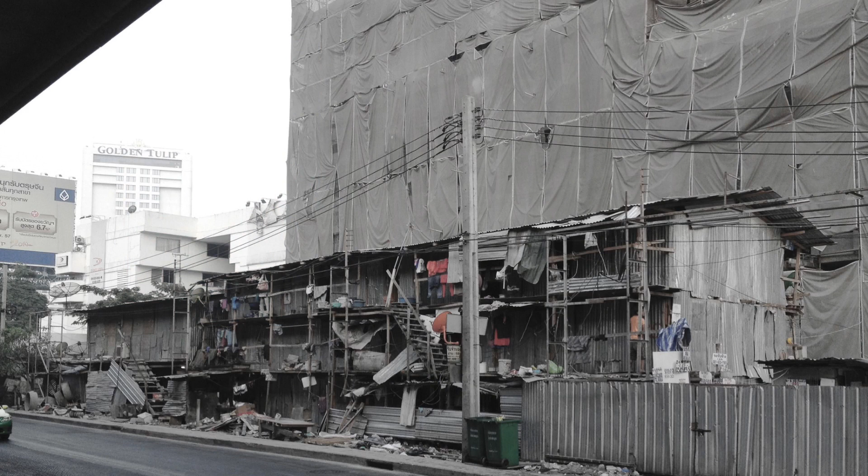I started looking at construction worker houses. Do you have construction worker houses in here? So see, we're brothers and sisters.

But if you ask most people, even architects, they look at this and don't see any value in it. But to me, this elevation has so much life and authenticity. You can see people, okay, it's messy, that's fine, but the composition is done in a very organic way. You can see where people wash their clothes, cook their dinners, drink their liquor, play hooky from work. So it's a very authentic and true architecture.

When I first started photographing it, I just thought it looked interesting. I didn't know why, it made me feel a certain way, that it's authentic. But I wasn't brave enough to do anything more until one day I said, I'm gonna draw it, because if it's interesting enough, we should treat it as real, genuine architecture and give it respect. So we went in, first I photographed it, then I measured it, and started to draw and understand what a construction worker house is, very simply.

The rooms are small, right? Very hot, very uncomfortable, many times out of corrugated metal. But there's another element, always: a scaffolding. Usually a circulation or veranda or covered overhang that becomes a mask, or becomes what I call a life scaffolding, that fulfills many functions, tropically and in life.

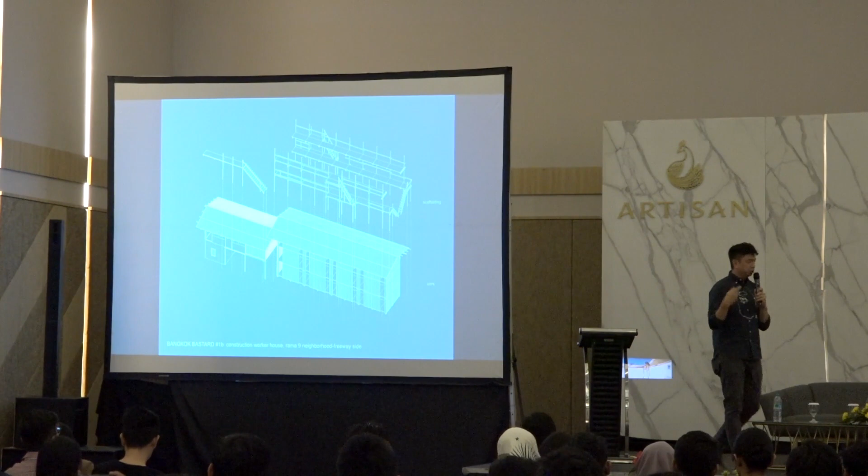The scaffolding becomes a place where in the daytime the workers never stay inside, it's too hot, so they hang out on the scaffolding. They cook, they eat, they talk, they socialize, they get drunk, they fight. And we start to see a pattern of how these rooms and the scaffolding change in order to adapt to different situations.

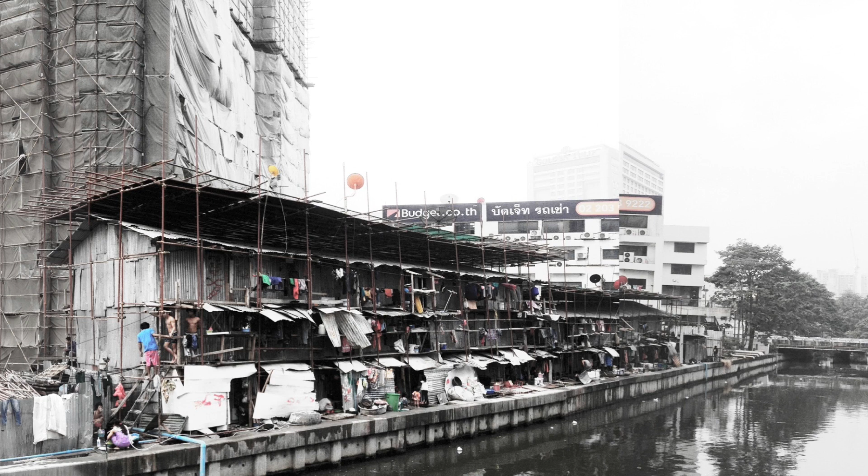For example, this is the same condominium development that has a construction worker house in the back, next to the canal. But here the scaffolding has been transformed into a helmet, to block construction particles from going down through the roof. So now it's a defensive hat.

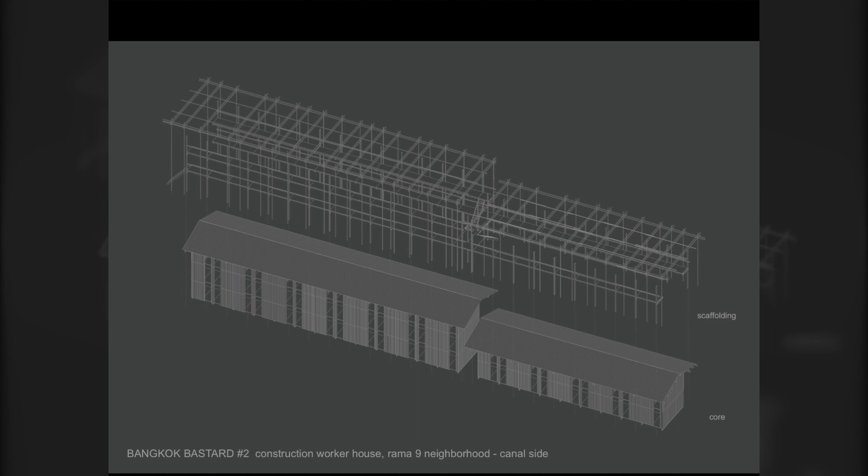If you understand these single modular elements, you understand that you can manipulate them. The scaffolding could be on the outside, or it could be on the inside as a double-loaded corridor. Isn't this a beautiful building? No architect designed this, just construction workers.

And so this one has an internal corridor, a double-loaded corridor, that is also a wind tunnel. So they cook and eat here as well.

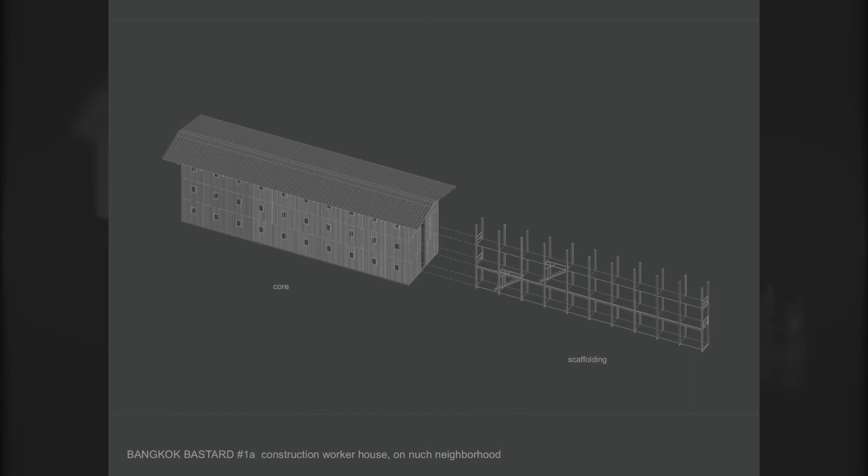And so if these are single buildings, they can then be added together to become housing. Core, scaffolding, core, scaffolding, core.

And the great thing about Bangkok Bastards is that it's a loose system that people can improvise once they start building it. For example, look at this beautiful scaffolding corridor with corrugated metal sheet bent as a rain gutter, and the light reflects onto the underside of the ceiling.

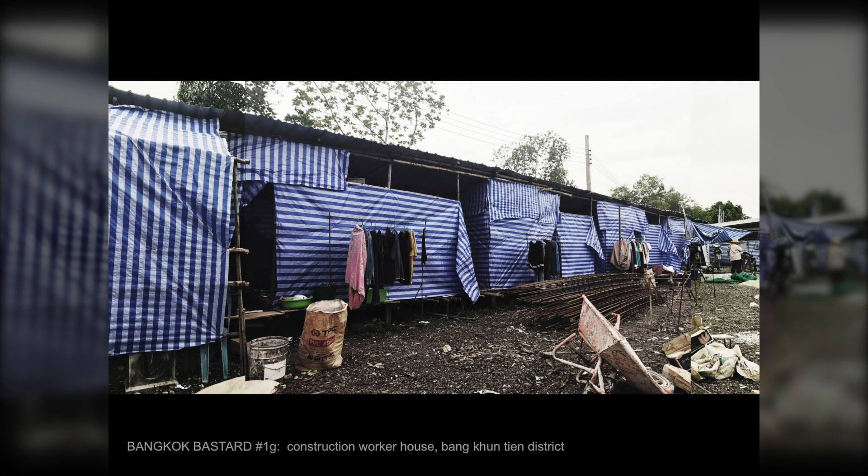Or they change the corrugated metal to building fabric. Cooler, but it also changes the meaning of architecture. So instead of opening a door with a doorknob, you unbutton the door.

And inside, because construction workers, usually migrant workers or local Thais, it's a temporary house, there's no furniture, they just sit and sleep on the floor. All they need to do is redefine what a window is. A window doesn't need to be plus 80 or 75 centimeters off the ground, it's right on the ground, because if you sit here, you just need the light down low. So you just peel your window up. It changes the meaning of architecture.

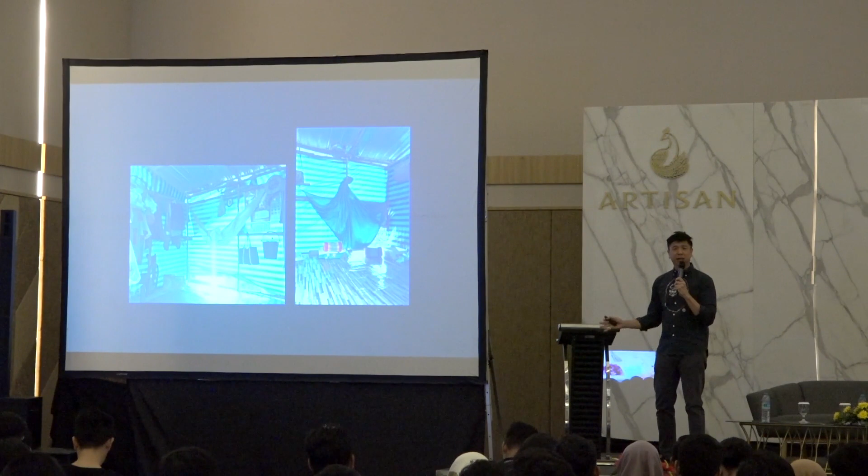In the most innocent way. There's no pretension about this. And so I started studying construction worker houses, and I started to diagram them in isometric. Drawing is very important to me. It sounds old-fashioned, but it's our main tool. Our main tools to see the world are plan, section, elevation, isometric, perspective maybe. So I always approach every project with these dumb, incredible tools.

So after the construction worker house, I wanted to go more into detail on these bastards, because I felt like diagramming them only reveals a very diagrammatic understanding of the architecture. But if I wanted to prove something else about why this architecture is so special, I have to go into more detail. Because when you have a view about architecture, it's all about a hypothesis, something that you kind of feel is true, but you don't know if it's true.

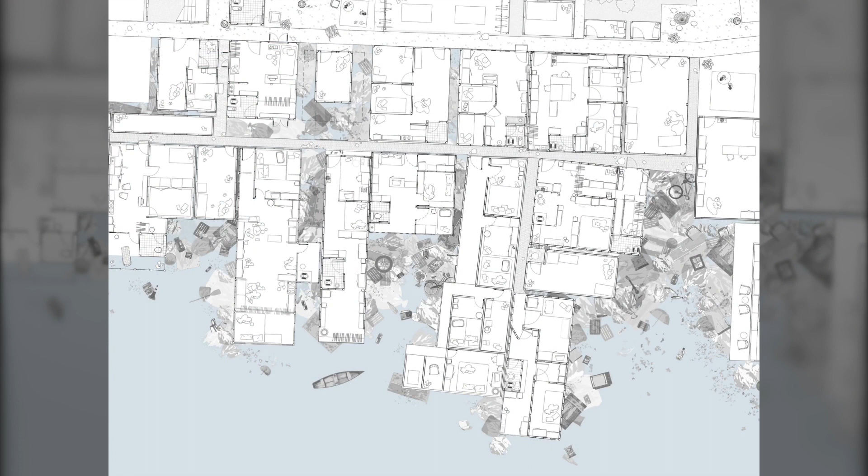So we drew everything—you see the insides of it? We drew pillows and mattresses and clothes hangers and cats and dogs, even the garbage in the water, because I feel like architecture for us isn't just construction, but small objects—potted plants, pillows, sofas, furniture, even bicycles. All of these make space in Bangkok.

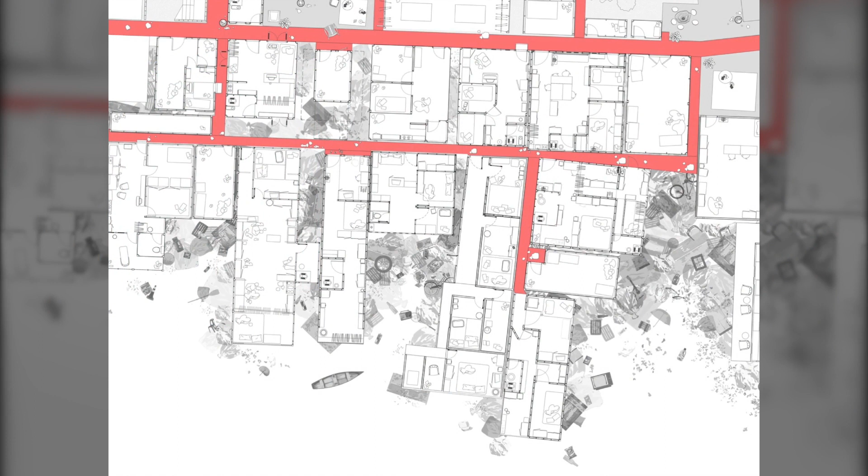Then we start to understand that similarly to the scaffolding, the circulation element becomes the outdoor community rooms where people come out of the hot, small interiors and hang out on these small 2-meter wide alleys. With this drawing, do you realize how much space and how much life this creates? These pots and pans and Buddha images and refrigerators and trash—the building becomes a whole different Asian thing, right?

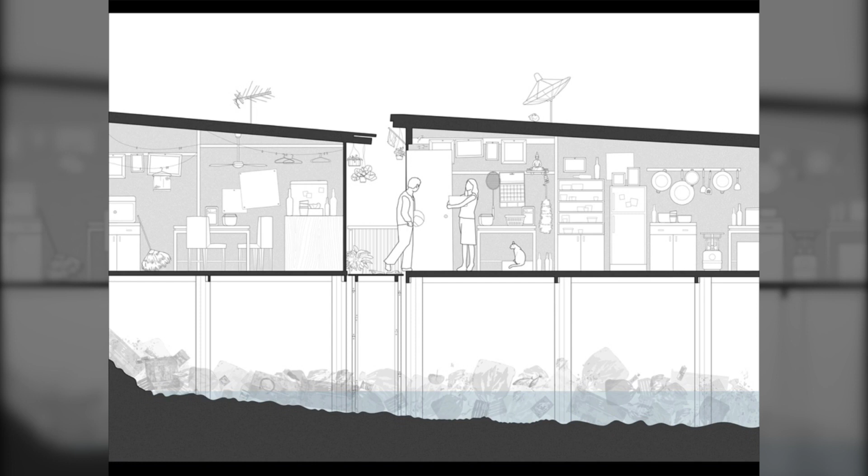So this is an important picture because it shows how life happens in the cracks in between and circulation—in informal spaces where, you know, alcohol, beer bottles, and baskets is architecture.

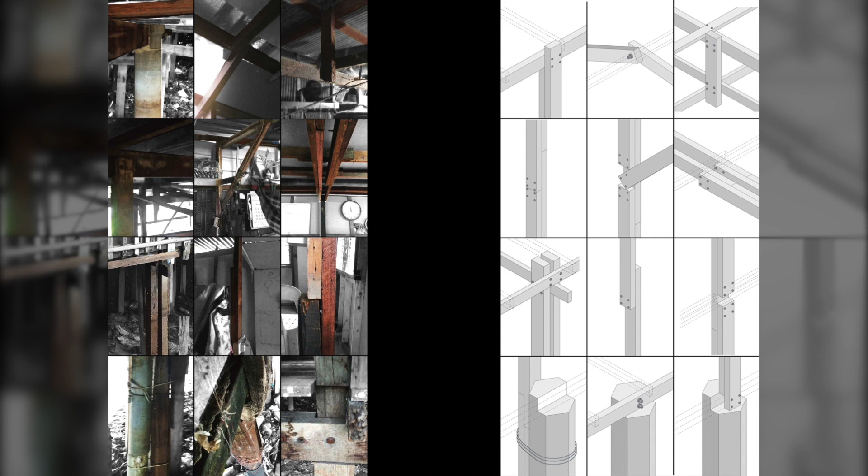So we went even further to study these structures in detail to see how the connections are made from used parts—old wood members, old steel tubes from construction sites, even old telephone poles are reused. But the connection is very unique—they're all fast joints.

Not Japanese like mortise and tenon where everything comes in crisp—we're the opposite. They're called bastard joints, because they have to be fast joints that you can attach quickly and detach quickly, because tomorrow the police will come and take you away, so you have to move. So the joints express this bastardness, right?

I'm going to skip between research and design to see how we work, because it is just a straight formula. This is the first project—I'll show you just 3 projects today. Sala Arya is a house and yoga studio for a friend.

She herself is an import—she was kind of raised in America and moved back to Thailand. So we have similar multicultural backgrounds and it's expressed in the project.

This project is in an exclusive residential neighborhood. I was talking to Andy yesterday about how I think the goal of middle-class Asians is to make money and move out of the city and buy a house with a garden, right? That's how in Jakarta you have land and house developments—single detached homes with a garden. I think a lot of people would like to have more space, have their own home.

So the way we conceptualize this project, and thinking about the research, the house architecture isn't the main actor. The main actor of this is called the soi, or the alley, the same type of alley that we saw in the waterside community, because we feel like the alley is actually a place where public life and the outdoor environment can actually thrive.

So this house is unique in that it mixes private and public. When the gate is closed, it's a house, a private house. But when the gate is completely thrown open, it is an extension of the alley in front of the house, which pulls you through the house and to the water beyond.

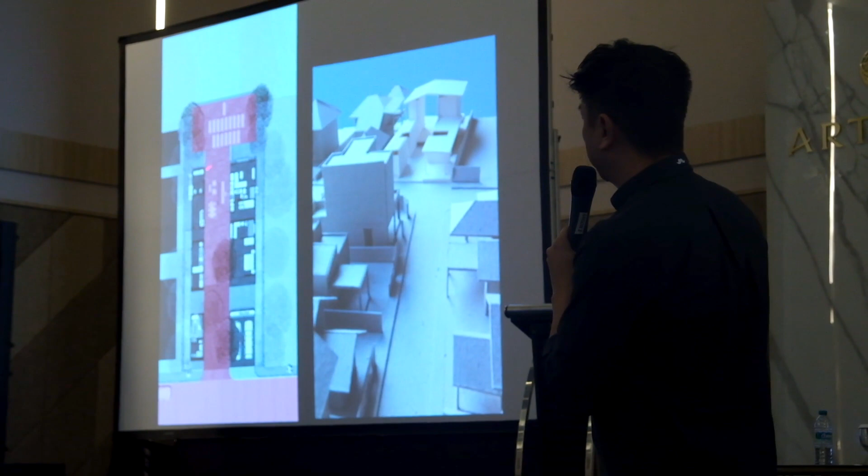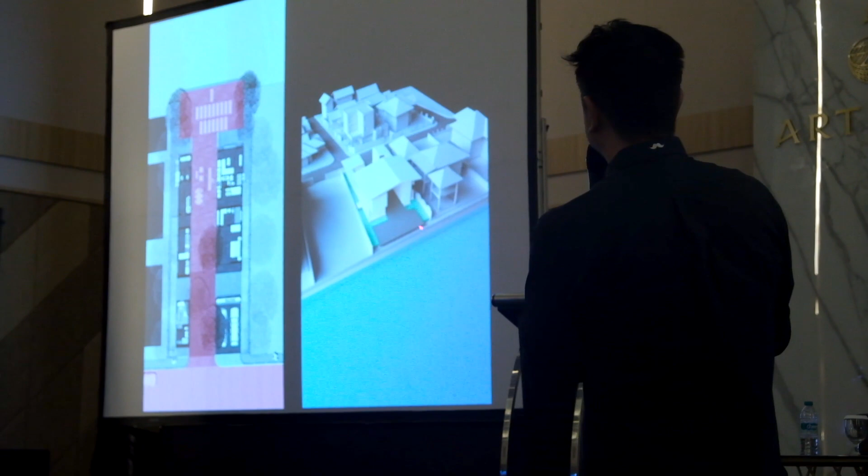So the houses are these two long longitudinal masses. Seen from the water, it's like a snake, like a cobra, that slides along, and its head comes up to become the master bedroom on top and a guest bedroom here. But the main space is this no air conditioning, completely passive ventilated outdoor alley.

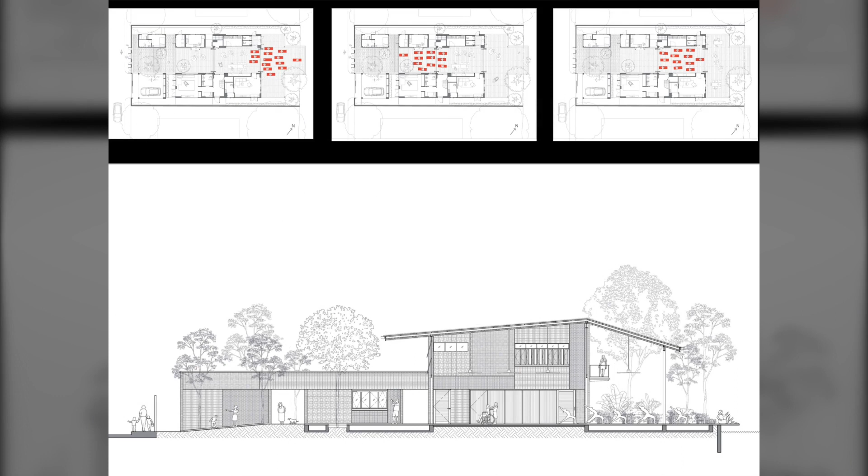So you see the plan right here, the ground floor plan, where the gate is thrown open and the neighborhood can spill in and learn yoga. In section, it's just a simple shed roof at the end that works as a kind of time-lapse shading device.

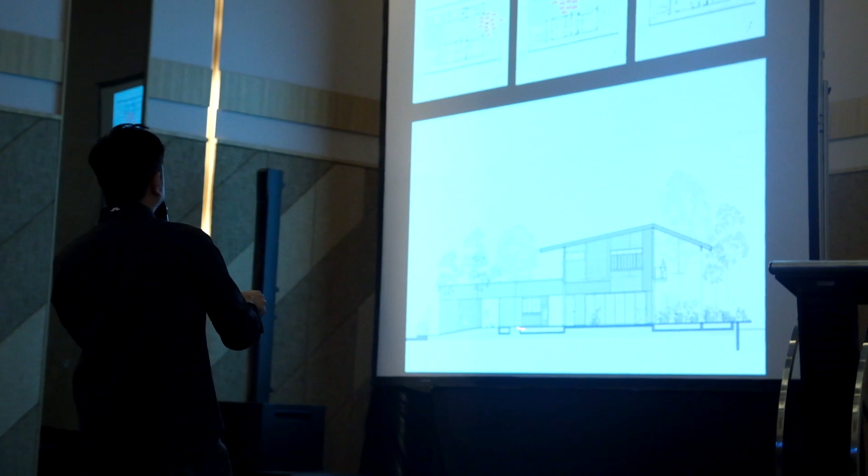For example, in the morning when the sun is coming from the east, they come and practice yoga here so that the shadow of the roof protects them. In the afternoon, when the sun is going down this way, they come and practice on the lake side so that the roof gives them shade. And when it's raining, they just practice underneath the roof right here in the middle.

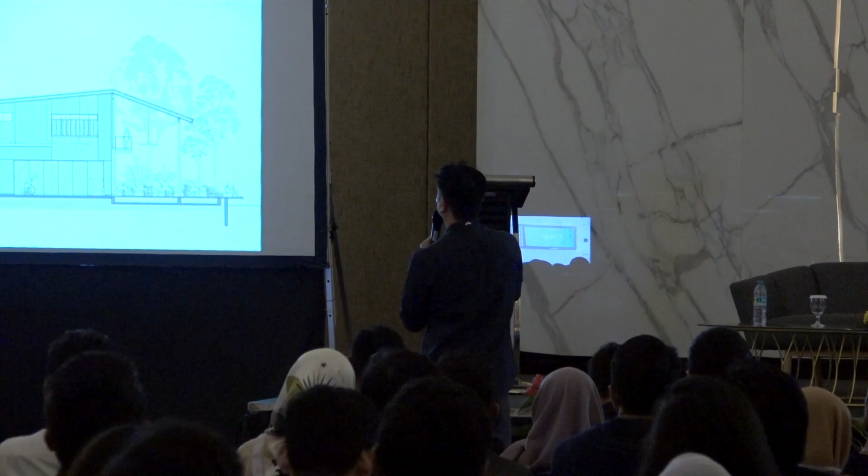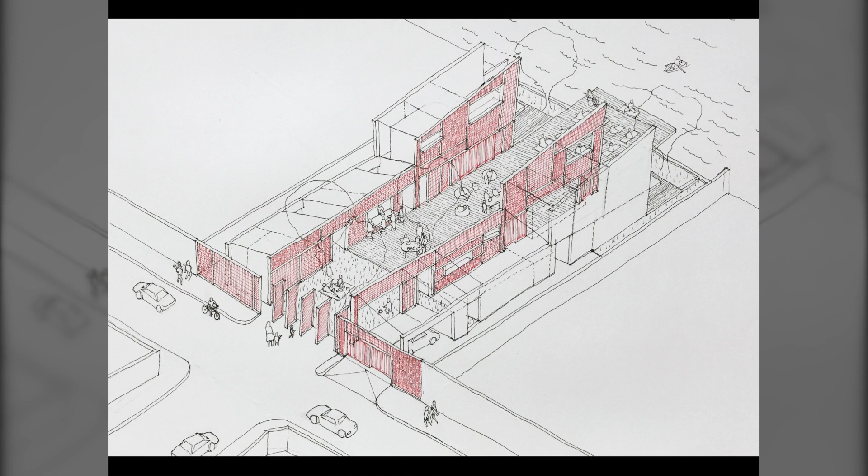The material finish is very important. We wanted to choose a material and use it in such a way that it becomes urban, architecture, and interior. Our projects are always trying to erase the boundary that separates these elements.

So we decided to use a special type of bastard brick, a bachinya brick. It starts from the gate and it bleeds and pulls the visitor inside the house, into the river, into the lake.

These are old doors salvaged from a 40-year-old Thai house. Their shutter doors are completely thrown open, and visitors and neighbors can just walk in and practice yoga here. So this house becomes a part of the street, much like the shop house, where the bottom level used to be part of the neighborhood. But now it's a suburban model, right?

So this is the multi-purpose space that they practice yoga on. No air conditioning at all, it's always open air, and there's always a breeze going through, cross ventilation. Inside, underneath the canopy, there are hard surfaces and softer surfaces for headstands and handstands for yoga.

But inside here is storage, a big storage room to put all the mobile furniture in, because the lifestyle in this house is very flexible. Whenever there's yoga school, all the furniture on wheels is wheeled in and stored there, so it becomes a multi-purpose space.

And if you go upstairs, the cabinetry is all wicker, rattan, so that the shoe cabinet ventilates. When you get to the back, this is where they practice yoga in the afternoon to escape the sun from the other side. But once they finish yoga, they relax and bring out all the mobile cushioned furniture.

And in the evening, it just becomes a relaxed space. The use of materials is important. We always like to use scavenged materials, but materials that have meaning, memory.

This is the guest bedroom that I told you about. So this is in the central void, so there are these green shutters or windows that happen in the interior, so it feels like it's an interior-exterior space. Same thing at the master bedroom volume, where you can open the green shutters and look down. But there's a kind of another layer of meaning behind it.

We bought these green shutters, 500 baht a piece, like super cheap. It's like $11. It's all teak wood, saved from an old elementary Thai school. I don't know how it is here, but in Thailand, if you see this color and shutters, you know it came from an elementary school like this. This is kind of too fancy, like a rich boy's school.

Usually it's much simpler, 2 levels with a corridor. It's either green, pink, baby blue, or purple in Thailand when I was a kid. Once you see that, that's why we kept the original green. We like the idea of this old Thai school element now being used in a yoga school.

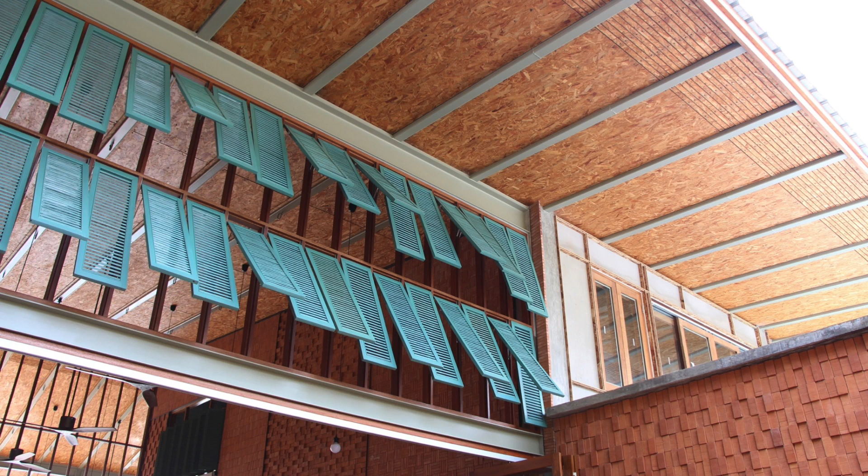When they combine, they kind of create a blurry overlap. We don't need to explain that this means this and this, but hopefully to somebody who knows these, it creates a blurry memory. I think it's super important to not just say, this is the concept, I'm going to show you very clearly this, and this.

The house is a butterfly, so it has wings, right? That's very first year architecture school, which I did in first year, I did a house with a butterfly. I think the idea of memory and being blurry and having many meanings is really good in architecture, right?

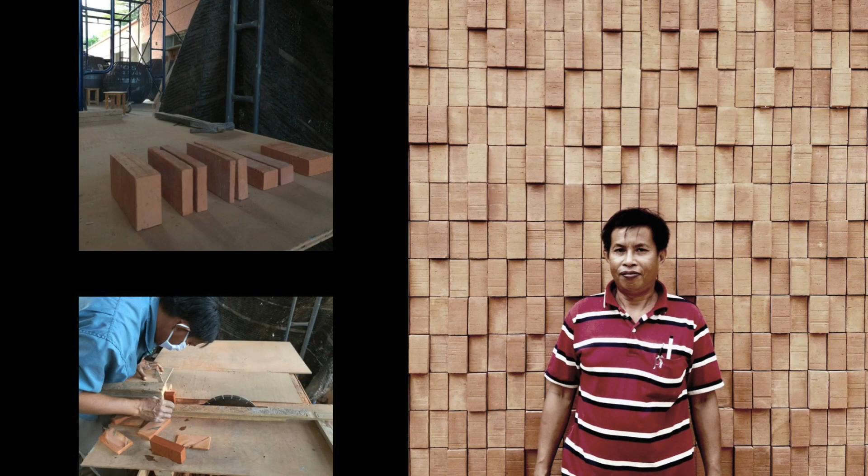Every job site has problems, catastrophic problems, but it's how you handle them. You see them as negative or as an opportunity to do something special. When we ordered the brick for this house, it was supposed to be 12 centimeters wide. We put in a 50% deposit, and when the first batch came and they unloaded the brick, instead of being 12 centimeters wide, it was 9 centimeters.

I asked the brick supplier what happened to the brick. He said, oh, there's a small shrinking percentage error. I said, how do you shrink 3 centimeters? That's 25%. I'm sure this type of problem happens on job sites here, and we couldn't do anything. So what happens if the brick shrinks from 12 centimeters to 9 centimeters? I won't have enough bricks to cover the building, so a quarter of the building will not have brick on it.

So I said, oh shit. This is our carpenter, Chang Nu. He calls me An, my nickname. Kun An, don't worry, I have a solution, I'm gonna chop the bricks. He chopped 15,000 bricks in 3 days on his table saw. And we agreed that he shouldn't chop them the same size, he should vary the sizes so that his hand is seen through it.

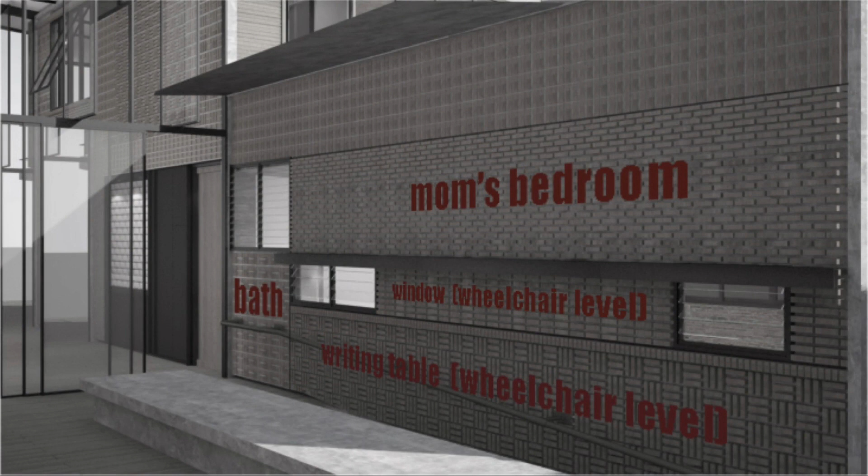But the patterns aren't random. Each collage represents a hidden function, built-ins, or activity inside the interiors of that mass, so it becomes a code for something more meaningful. So that's that wall right there. That wall is actually a low counter for her mom, who is in a wheelchair, so you can actually see the DNA of the wheelchair occupant in there. That's the bathroom, that's the ceiling plane.

So, in essence, the lessons we learn in this small little soi and alley translate into something similar in DNA, but may not look the same. So I'm showing you how research creeps in, right? I've been doing this research for 5 years. I didn't know when it was going to come in.

Next, I'm going to show you a hotel in the mountains. This one's called Labaris in the Mountains. This one didn't have documented case studies, but it came out of accumulated knowledge over the years as to the attitude we should have about resort architecture.

I'm sure you have this in Indonesia. So this is a resort in a very beautiful mountain forest preserve, with beautiful exotic animals that are only local to Khao Yai, or Big Mountain here. So it's a great natural environment.

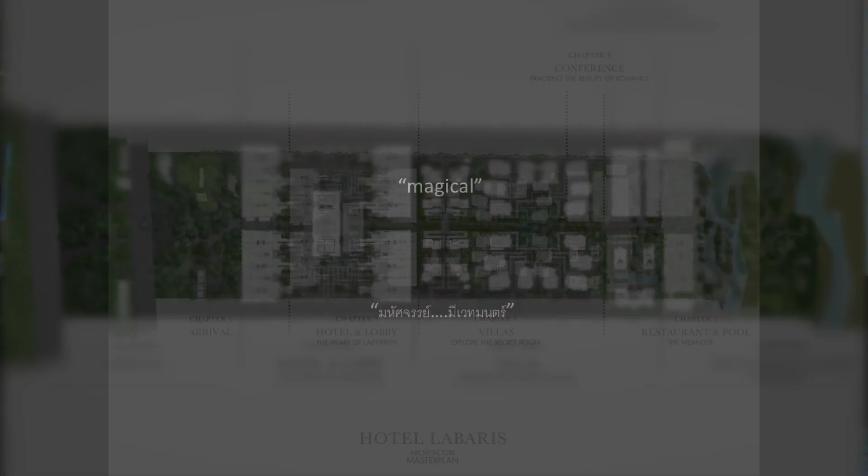And so what we did was this. The plot is, this is the street in front, and the plot is kind of a longitudinal plot. So there are mountain ranges on this side and mountain ranges on that side, beautiful views this way and that way of a wall of mountains. We're in the valley, and there's a beautiful natural stream at the back.

So what we told the client was that this will be a magical place. But instead of a master plan, we're dividing this like a storybook into 5 chapters: Chapter 1, Chapter 2, Chapter 3, Chapter 4, Chapter 5. And so there are different resort components: this is a welcoming garden, hotel rooms, villas, the Great Hall which is restaurant and conference, and then the swimming pool.

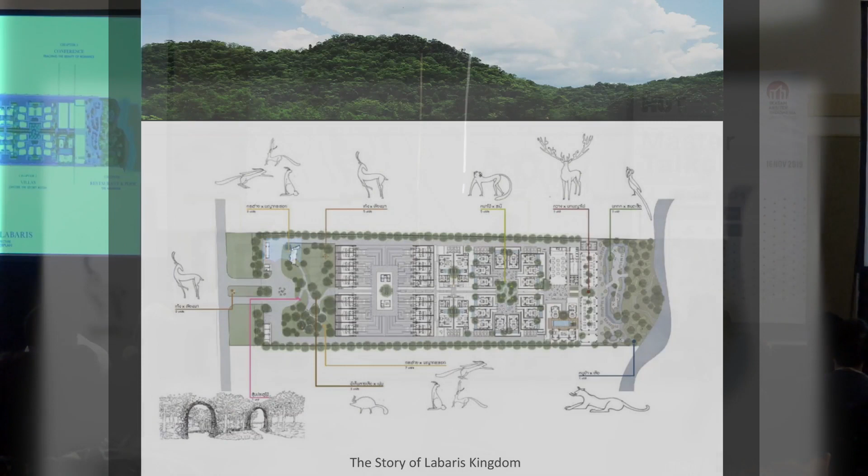But there are always 2 ways to tell a story, right? We work with a great graphic designer and brander called Be Our Friend. So together we researched that in Khao Yai National Park, there are all these unique big mountain animal species, from deer to fawn to rabbits to porcupine, to little muskrats, and even leopards that are very local Thai species.

And so this whole resort is a kingdom for these special Thai species. It's a way of giving respect back to this, not as a European resort, but actually something that's naturally, environmentally, and locally based. So we want to teach, especially the kids, when you come to this resort, you won't be transported to England, but you actually learn about the animals in this sanctuary, right?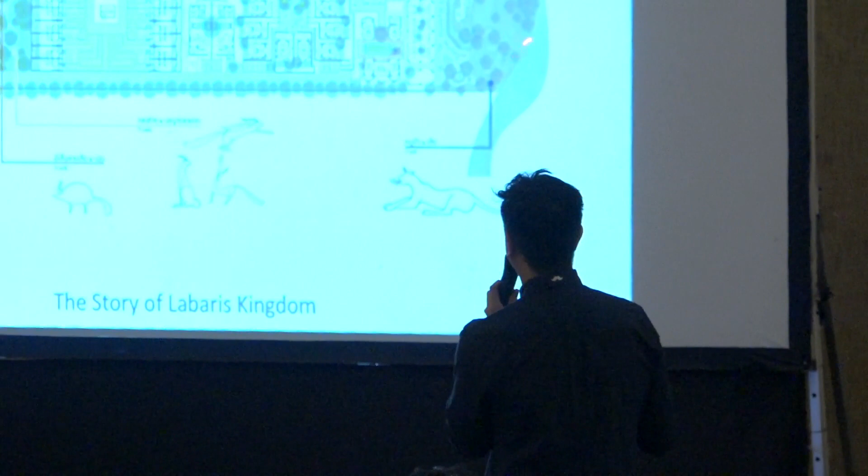But then we told them that in these 5 different chapters, different levels of society of animals live there. The lower society of animals, like the weaklings, the squirrels and the rabbits and the porcupines, live in this kind of everyday garden maze. The king lives in the hotel, which is like a palace, right? And the noble people, the noble animals live in the villas, right? And this is a throne hall, which is the restaurant, right? And finally, the swimming pool becomes an extension of the river in the back.

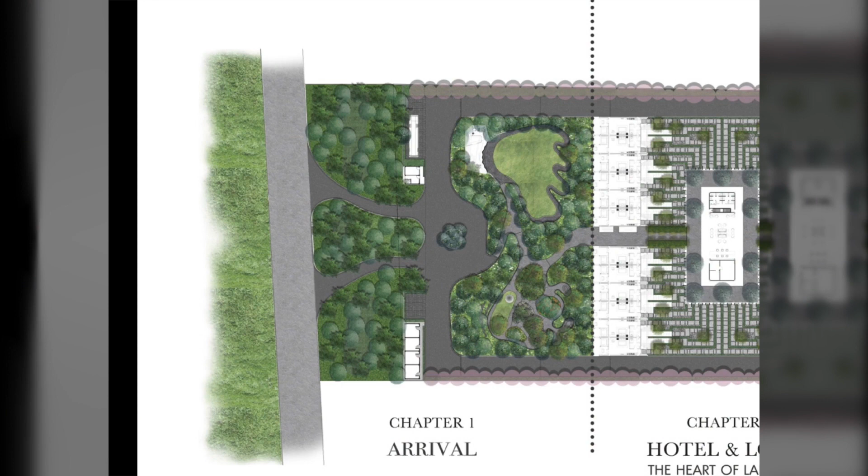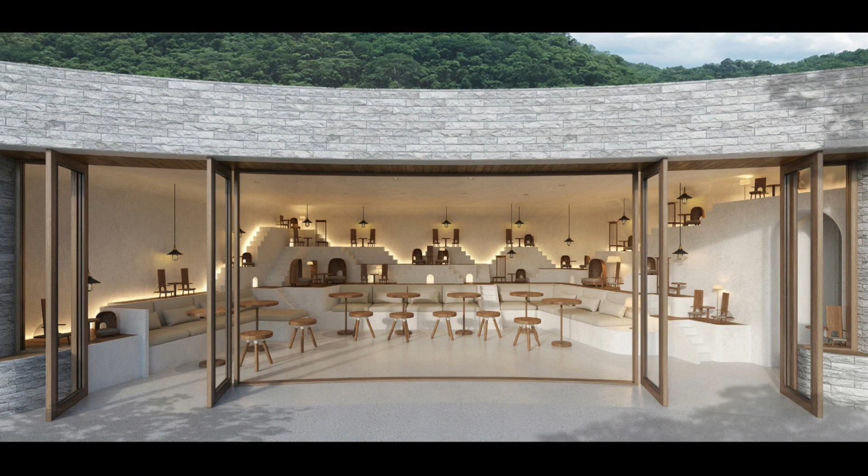So there are little burrows, little tunnels of animals and sculptures in these hillocks, right? But then it leads you to this cafe. This is a cafe that the public who's not staying at the hotel can stay at. And inside is actually where we say that all the little animals, the lower class, the rabbits and the porcupine and the squirrels come to the pub here.

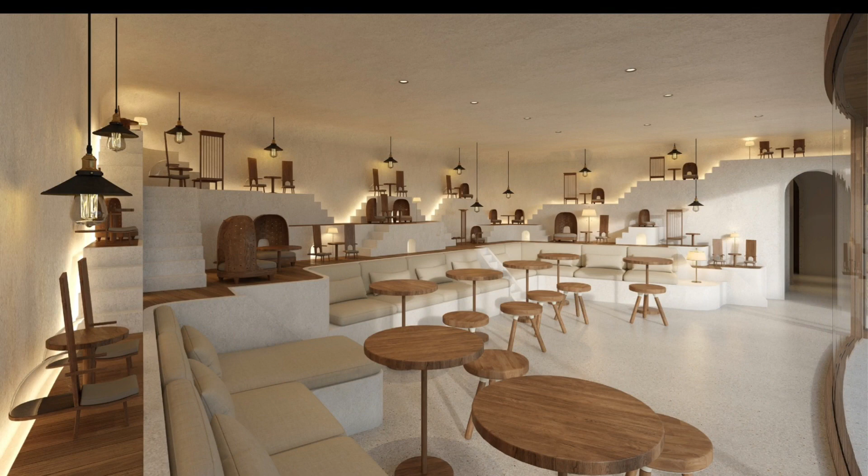And if you look, there are small little tunnels all over and small little customized furniture. This one is for a porcupine so that the needles can stick out. This one's for a rabbit where the tail can stick through. There's one with long legs for a special bird. And so we built this story where we said that the entire national forest is full of a network of tunnels where all these animals go through and travel and emerge from here into the cafe. So these are some photos we have of the real thing.

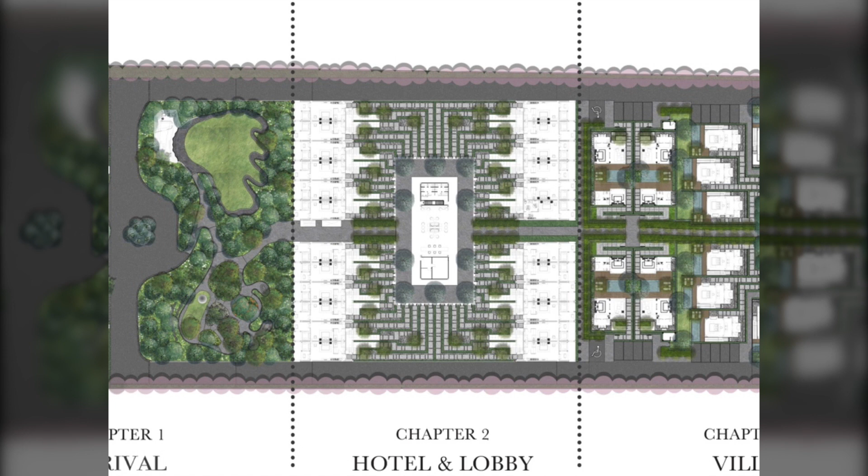Next, we have the hotel element. This is kind of like one of the critical players in this project. Again, there's kind of always a double story, both meaningful. So the hotel rooms are here and here. What we told the client was that this is actually a magical castle, right? Where the stone mass surrounds the cloister garden in the middle, right? In actuality, these are all shop house modules, 5 meters wide, just 2 strips with a connecting wall, right? We always have these secrets that deal with budget and always play double meaning.

So what happens is, similar to the labyrinth, and I'll tell you the history of the labyrinth. This is a drone shot. As a visitor, you come through the middle module, which is kind of like a gable tunnel that takes you to the heart of the maze, right? This is the heart of the maze. So you go through here into the middle of the garden. Go through this big portal, through a garden, and into this open air pavilion, which is the lobby.

And in the lobby, you'll find these magical drawers, which you open up. You get a welcoming package with your magical horns. Oh, all the creatures have magical horns. So we have a magical horn keychain, right? And a road map, and card key, and welcoming letter. And you take your key to the maze in the garden, because there are 48 different doors, all different. And you have to choose which one you go through, okay?

The maze can take you straight, but you may never see what the end of the road is. It makes you turn, and then you find your entry into your hotel room. Or it takes you to a stair that takes you to a second level. You never know where you're going to wind up.

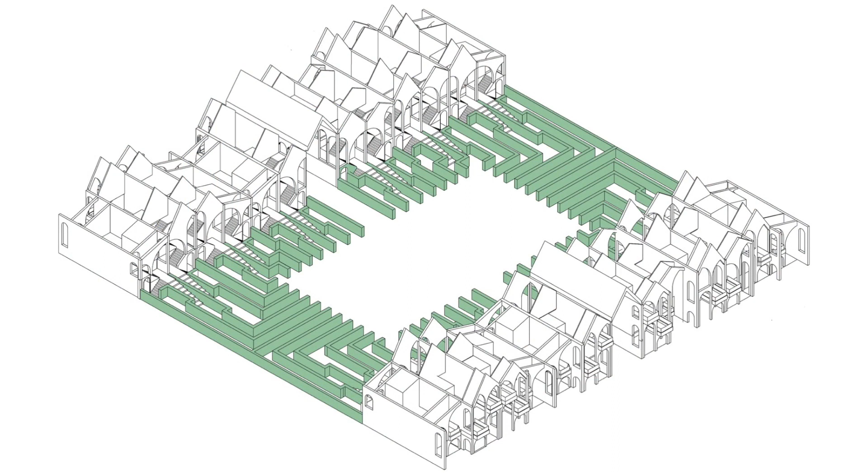And also, traditionally, the maze only has one entry and one exit. So we played the game in our minds that, what if there are 48 exits or 48 entrances? How does that change the idea of a maze from capturing a monster to welcoming hotel guests? We play these games all the time in our minds, right?

What happens with this is you're able to create a new type of resort, one where each room and each maze has its own private garden. So you have 48 different rooms with their own gardens, all geometrically not the same.

You can actually stay in your room, or you can have breakfast in your garden, or have outdoor activity. So we expand the area of a room to not just 30 square meters, but actually 40 to 60 square meters. Half of it is outdoors. And this labyrinth allows you to see your room with the back landscape of the mountains in the back.

So it creates a new type of mountain resort experience. And once you go up, you go through the maze, and you go up through this new type of architecture that's both Western and Eastern. This is another type of scaffolding in my mind, right? It's kind of a veranda area that allows you to set the rain and the sun away from the building, but the use of broken arches creates a new type of niche and volumes.

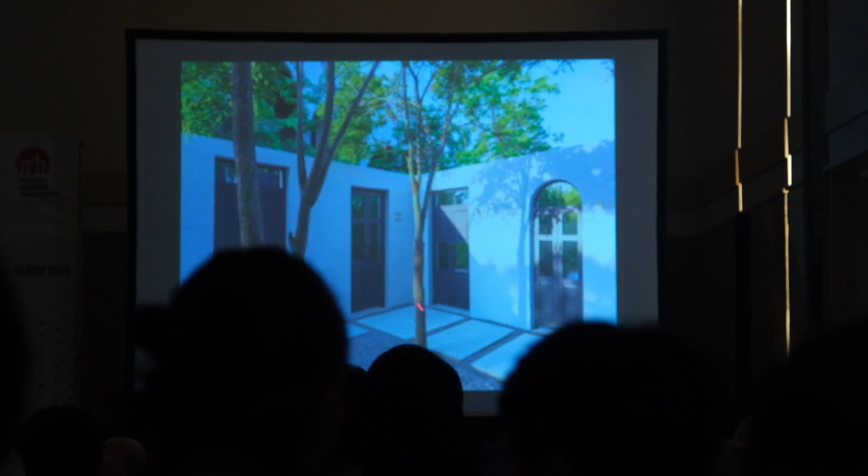The guest comes, usually Thai, and they say, wait, these are Thai doors. They have this narrow proportion, they have infill panels, but some of them have been taken out and turned into hollow, ventilatable screens or grills. So the idea of this Western and Eastern mixing in detail is important again here as well.

So we call it a new Khao Yai, which means big mountain, this sanctuary, this forest reserve, architectural language. So in creating a new language, we accept all the different languages, styles. We don't reject them, but create a new one, right?

So this is a collage we made at the beginning of the project, where first, Khao Yai had these sparse Thai houses that sat in the mountainside. But eventually, 20 years ago, these guys came in. We turned to this, we turned to that. So they're not random gables. It's encoded with meaning, right?

Even though the visitor or the reader may not understand it, it's still your responsibility to give it respect. I think that's important, I think that's the integrity of architecture. Not everybody has to understand what you're doing, which means that maybe you can't do just a dumb one-liner. You have to do something that has multiple readings, that it's rich, that has layers.

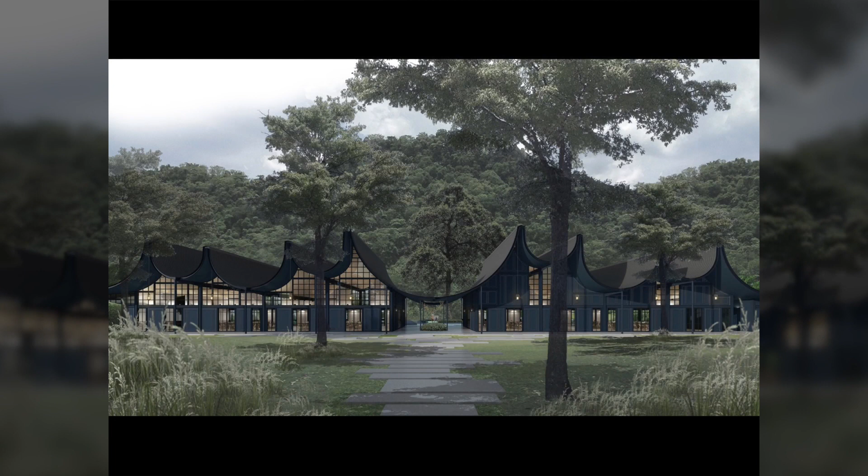And this is the real thing. Again, multiple meanings.

Secretly, I said it was a new typology of a Thai house, but I didn't tell my clients. I had another story for my client. I said, this is a magical kingdom. And the one person who lives here, okay, you see the underside of the curve and how it has another spatial meaningful reading. But I told them, this is a magical kingdom, and the one who presides over this is Dumbledore. And Dumbledore loves his magical hat. When arranged, it turns into this.

Both valid. Both valid. But what I was talking about with Andy is that I think good architecture has to have multiple readings. He said he looked at this and the first thing he thought of was this traditional Indonesian house with a very sweeping curved roof, which made my heart sing because that's exactly what I want.

I wanted to create an architecture that didn't speak only to Thai people, but to ASEAN. But I don't give a shit if nobody else understands. I care if we understand. If it's meaningful to us locals, I don't have to sell it to Europeans and Americans. We need to stop doing that. I don't need their awards. We don't need their awards, right? If we do something good that's meaningful and don't worry if everybody's going to understand it, it may just be the two of us, but if it has meaning, everybody else will see value in it. I think that was an important lesson for me.

Lastly, you have a swimming pool. That's another variation of the labyrinth, where it's a figure 8. So it's an infinity pool, you never know when it's going to end, almost like a maze. And it's an extension of the river in the back, right? I think this is one of the highlights of the resort.

Please come, but you have to book about 2 months ahead of time. But I think the garden is really great. It's done by a local landscape architecture firm that we work with called Shma.

So, Thai, Western, both bastards.

Last project. This hotel, the latest hotel, was just opened 2 months ago, called the Samsen Street Hotel. I have to give you a little backstory of this hotel.

The story begins when we were working on our first hotel called the Nanda Heritage Hotel. This hotel was on a road in the neighborhood of this next hotel. While I was working on this hotel, I tried to create a typology of a hotel or a public building that is next to a busy Thai street, a Bangkok street.

So what happened is, I still wanted to create an outdoor court or a lung for the city for all our buildings. So we designed a special kind of outdoor court that recycled old doors and windows from an owner's house. And then we created this little tunnel that filtered pollution and noise so that the busy street traffic, noise and dust didn't all go in here. But you can still see a glimpse, a taste of what's happening outside from the inside.

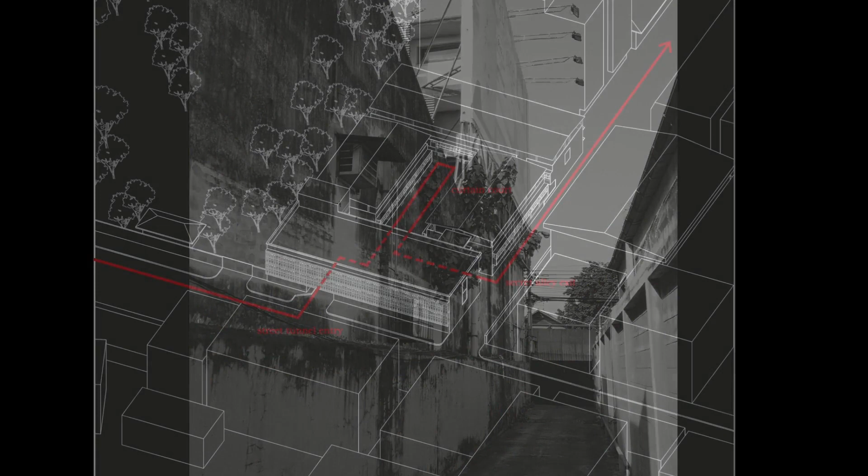And so I diagrammed it. Go here, do your thing, and then you leave.

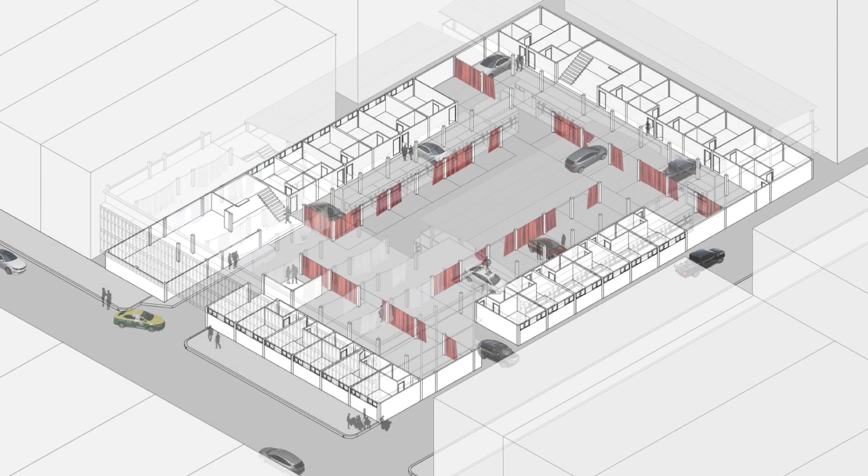We love this case study so much. We did this first study about 7 years ago. Last year, for a magazine in China, we did more analytical drawings where we cut the hotel in plan at the ground level to show the role of how the red curtains create space. And this is a section through the building.

How am I doing on time? Okay. 1 minute? 12 minutes, okay, no problem.

So this is a section cut through so you can see the sequence of the cars coming in, parking. My employees had to spend a whole day finding the right poses. If you look closely, there are a lot of different poses.

And then, for an exhibition we had in Tokyo, we made an animation. This was done with a local band called Paradise Bangkok Molam International Band. It's a local funk, local Molam rural country music.

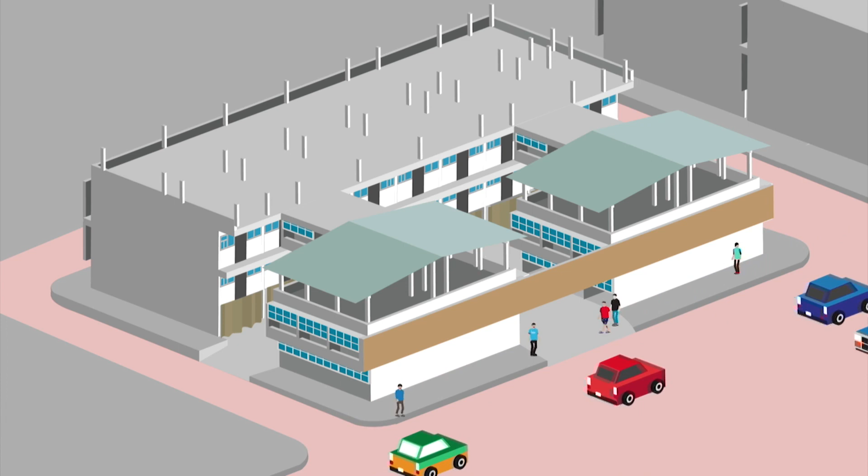So this is a story of how this old bald man said that he was going to go exercise every afternoon. But he doesn't really go exercise. He goes to picnics. But he doesn't come by car this time, he walks.

This is a part where I asked Andy if I'm not sure if I should show this.

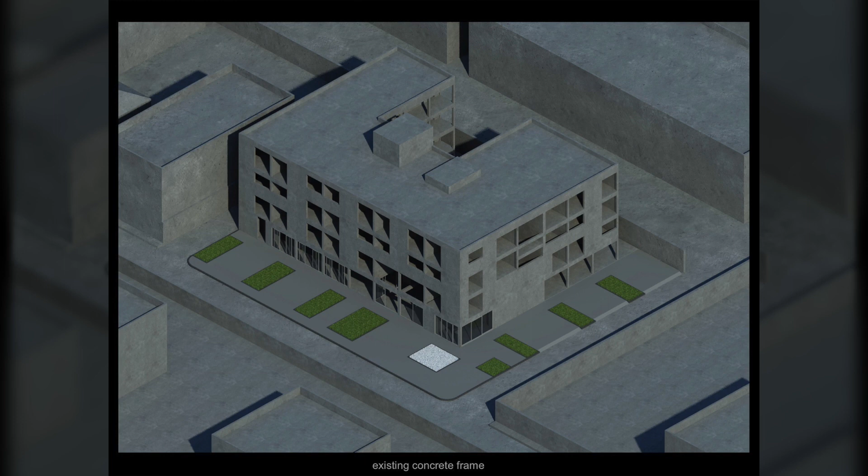This is what we're gonna do. We're gonna cantilever one bed out the facade without having to add any extra structural foundations, which is exactly what we did. With each room, we create a bed box, a day bed - it could be a day bed that you look out the window, or it could sleep a 3rd person. If this is an isometric of the building stripped down of its facade, this is the extra bed extrusion for each room. So what happens when the bed is extruded from the facade is you have these negative spaces, which are filled up by the scaffolding - you remember the scaffolding we researched at the beginning?

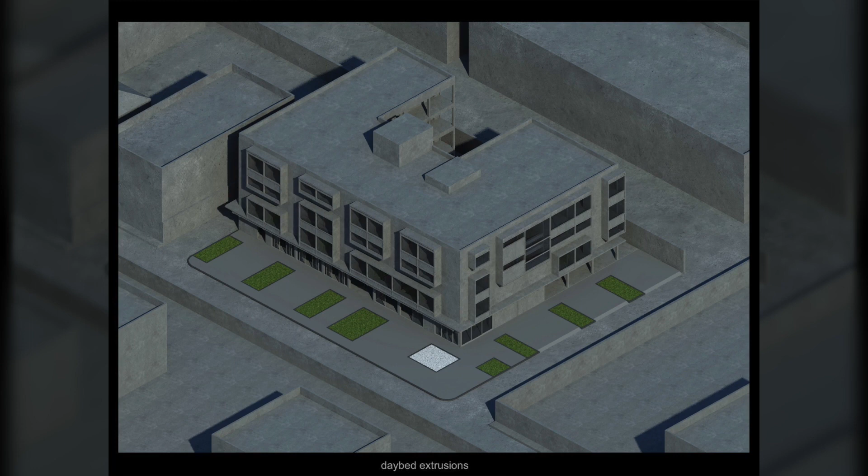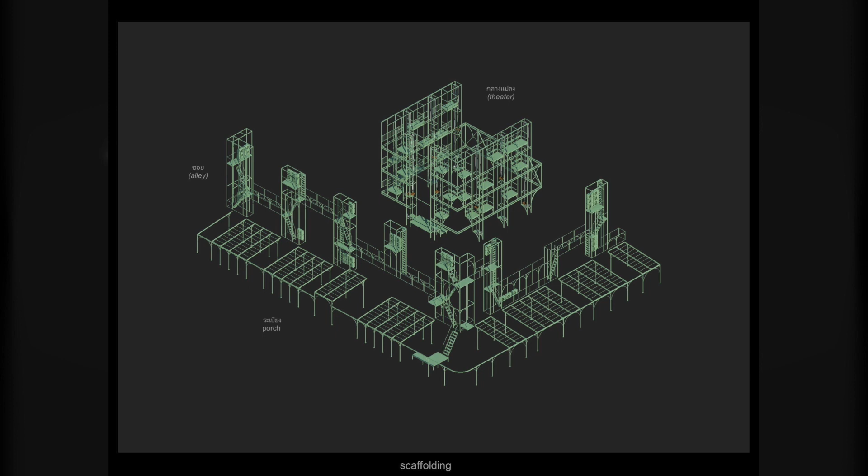Through the 5 or 7 years I've been working, finally I felt like it had its place. This scaffolding, this live scaffolding, will work in a way where it will flip the once mysterious and dark sex motel inside out - from a closed-off, introverted sex motel into an open, friendly street hotel. And the scaffolding does so in 3 components: there's the porch element right here, there's an alley or soi component here, and there's klang plaeng, which is the theater component.

The soi tries to solve a problem that's always a regular problem I find. I always have clients who are developers come to me and ask me to do an apartment or condominium, but always say, 'just use my plans, but I need a beautiful facade with nice balconies,' because foreigners love balconies in Bangkok - which is complete BS. In Bangkok, nobody ever uses a balcony. Does anybody ever live in the city and use a balcony here? What are balconies used for? Laundry, air condensers, right? That's the reality of Asian cities.

So what's the problem that comes with that? What happens if your air conditioning unit is broken? When you ask a repairman to come, how do they fix it? Where do they go?

You have to go into the unit, and the repairman must go through your bedroom. So they have to go through your apartment to service it, and they make it all dirty, right? And then your wife yells at you, right?

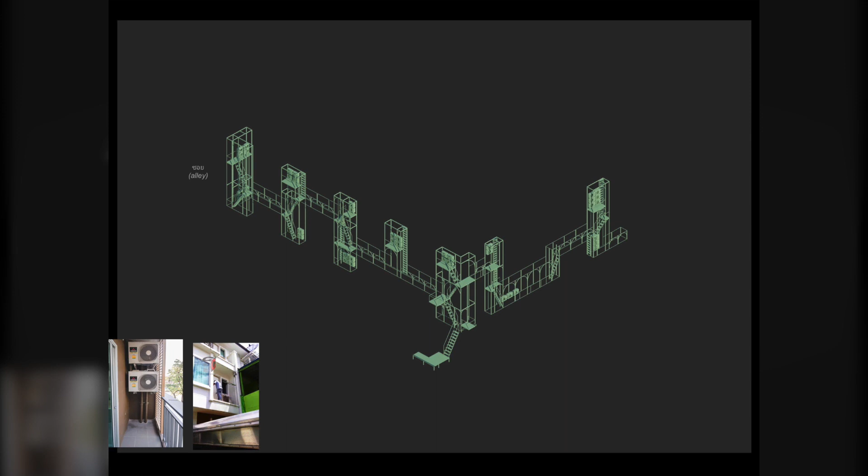So this happens. The soi is an alley that allows the repairman to climb through the facade to service all of the air conditioning units and all the electrical conduit and all the pipes. So we expose all the mechanical, electrical systems in the soi so that it could be easily serviceable, and it becomes part of the architecture, right? But the soi will have another surprise public function I'll show you later. So this is the soi.

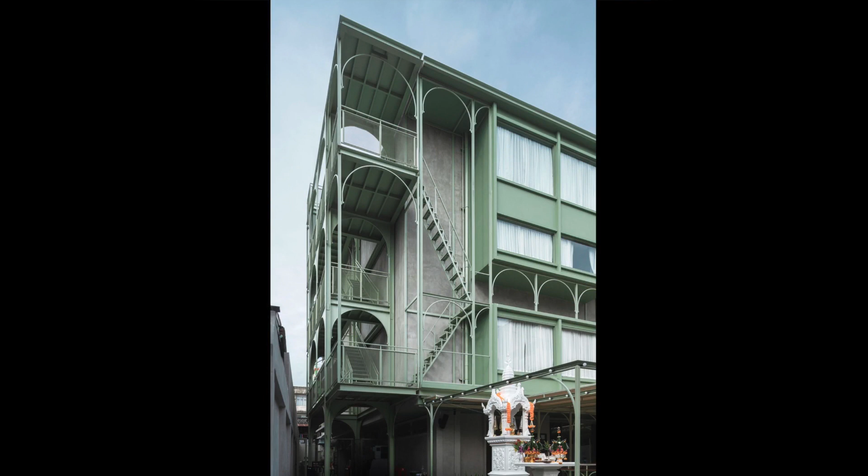This is very regular. This is a fire stair that leads to the soi mechanical servicing component. This is the stair at the corner of the building that gets you up. But this has to be a mobile or a temporary structure because of legal issues.

So this is another lesson learned. To get up here, we learned from another bastard. This is a stair we always find at the gas station in Bangkok. They made this homemade stair to change the light bulb in this high canopy. Have you ever noticed it? Next time you go to your local gas station, this is how they change it.

So this bastard, they thought we were weird. The whole office came to a gas station and started posing like selfies under their stair. They thought we were very strange, but it's a beautiful structure, right? Slim materials used very economically.

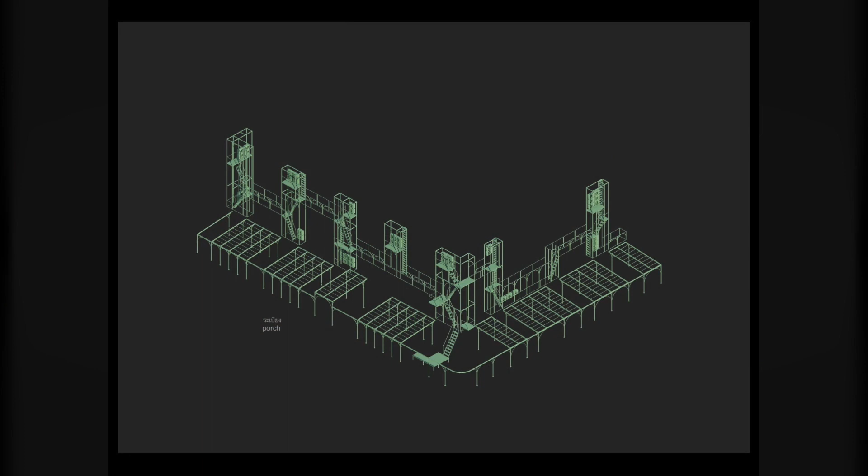So the porch, the second element, is this kind of covered area that covers a 6-meter setback between the lot line and the building. And what this does for the city is this: we go back to the idea that Papa Tony really built himself on street food. He loves Thai street food and wants to sustain it.

So what we're doing is we're working with neighbors. This is a local Thai sausage, Sai Krok Isan, vendor right next to our hotel, right? And this is Sister Kit, somebody who does custom dishes right on the site as well. So we went to them and talked about how we create a new hotel business brand or business model where, instead of having Westerners and foreigners come and eat pancakes and eggs and sausages — they don't want to come to Thailand to eat international breakfast, they want to come and have ba thong ko, which is a fried dough, or tofu milk, all these Thai street food delicacies — we talked to them about how we can actually have them come and sell their street food breakfast and meals in the hotel in a non-competitive way, as a way to build a brand for Bangkok, right?

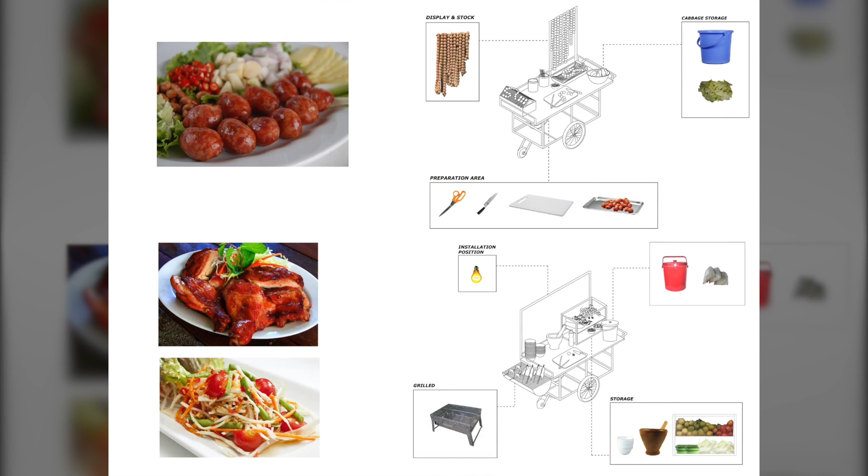And so with that, we start to do research on food carts, street food carts. Thai sausage, papaya salad, Thai chicken, satay, fruit. We did about 12 different research carts. And we designed these mobile furniture that could be wheeled out to take over the street when the police aren't here, and when city officials come back in, we just wheel it back in. That's very Thai, it's very ASEAN, right? You guys have that too, right? But we won't say anything.

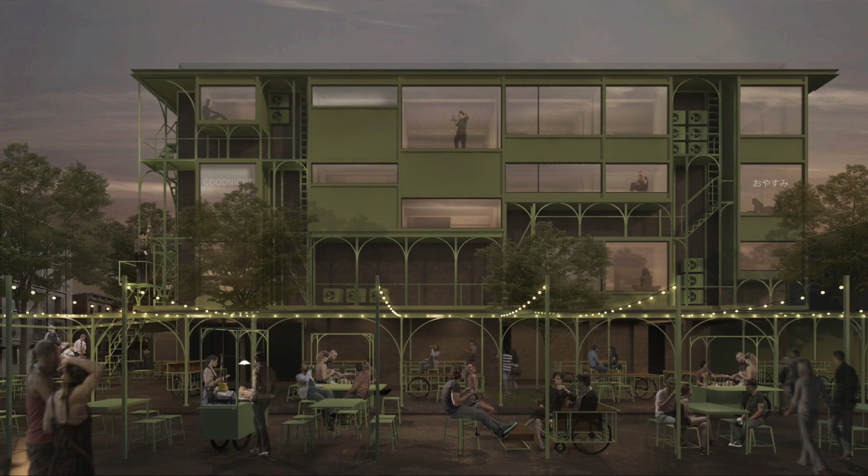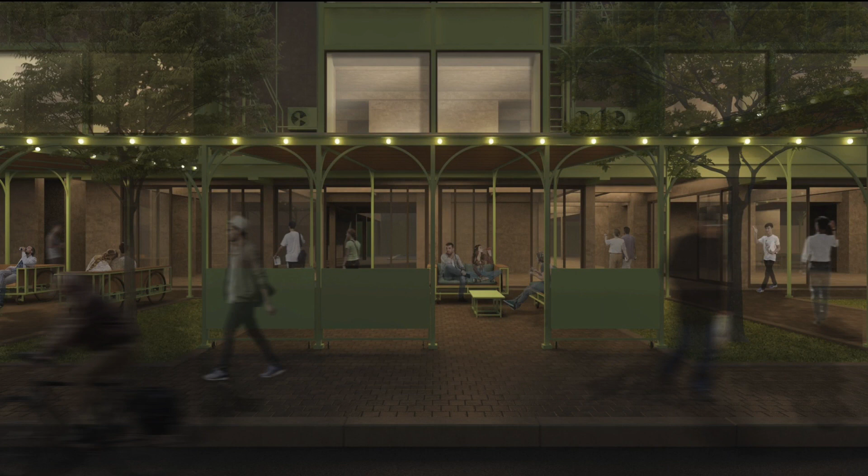And so what happens too, at nighttime, Papa Tony wants to kind of make a boundary, a border, so that people don't wander into the patio and sleep on his benches. So these small walls serve the purpose, but in the daytime they flip down to become sidewalk tables to activate the street. And remember the soi? Yeah, so this is how the tables flip down, and you can have lunches and conversations with people passing in the street.

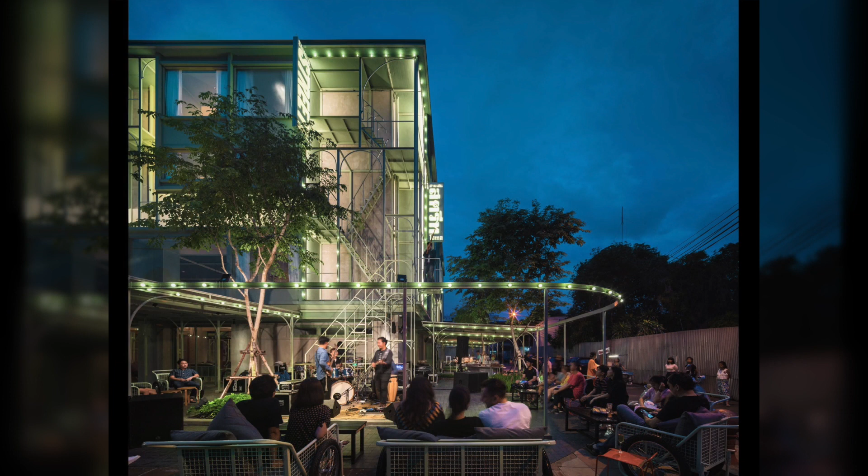And the soi, in the evening, becomes a vertical stage for street concerts. Okay, almost done. This is a local band that performs. So all the landings of the air conditioners become a vertical stage.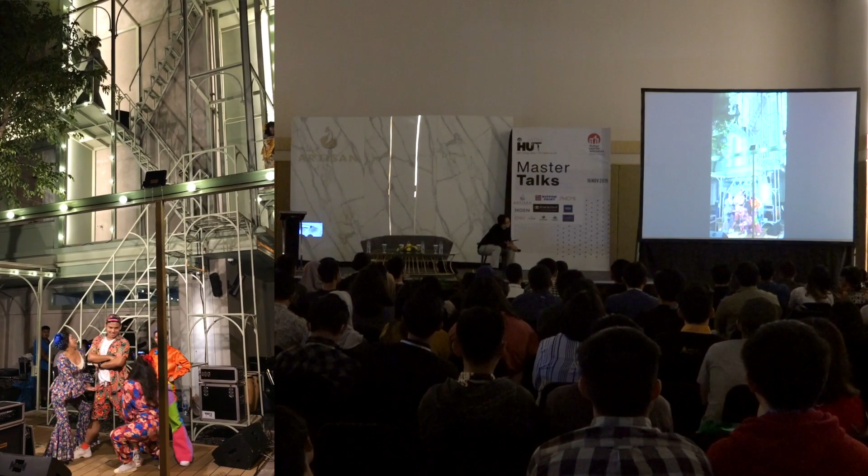This is a popular local Thai pop country song.

All the neighbors came out. You don't have to lower the sound.

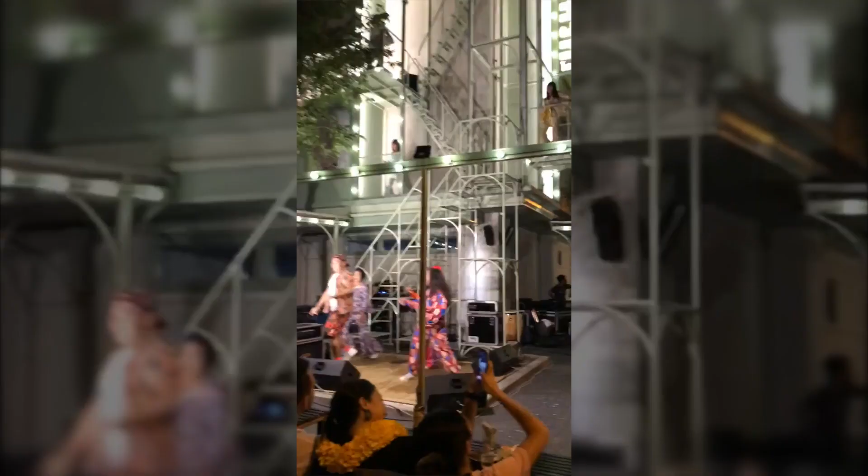More people came. You can see there are performers on all the landings too. So it draws—the whole street expands vertically as well.

That was a concert. It was really one of the best days for me as an architect to see that happen.

So let's say the concert is done, we're almost done. You can check into the hotel by going through the same tunnel. And then once you go into the lobby, the check-in counter is a new kind of street furniture on steroids with these vertical security grills.

And then when you come to the courtyard, there's an outdoor theater where you have a lounge pool where you can sit and watch movies.

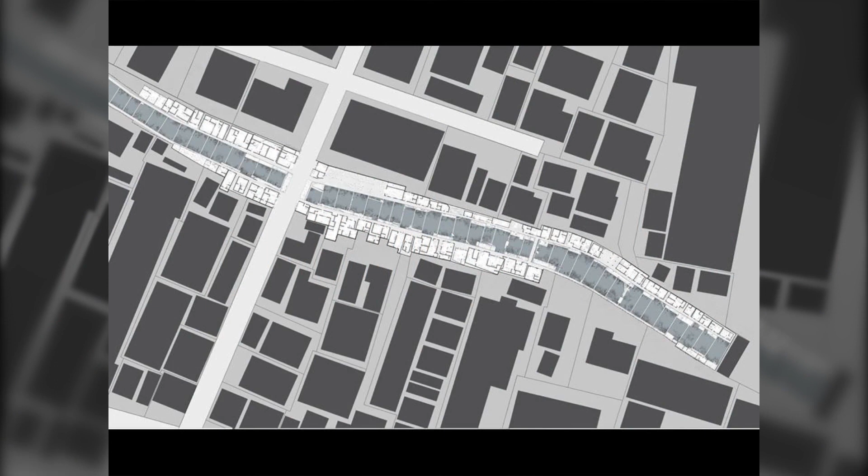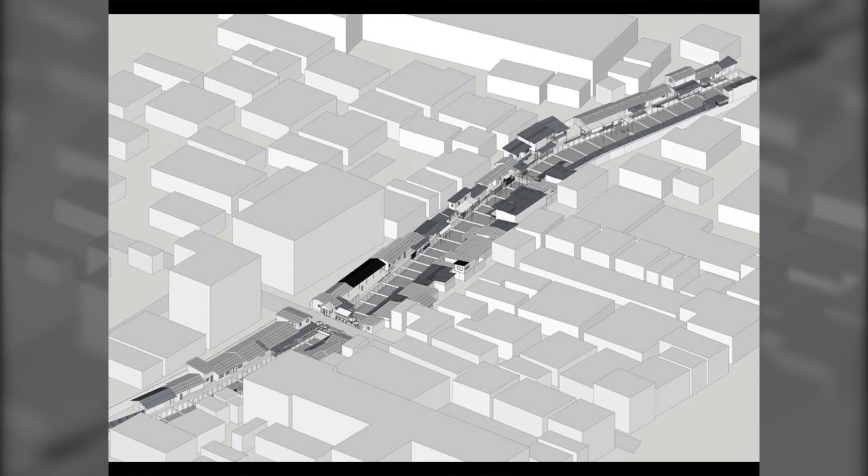Dirty, messy, but if you look close enough and survey, you start to see permanent residences, but also these illegal additions on the concrete beams that are great. Like these extensions of patios from the walkway become extensions of the house. This is a restaurant from this convenience store. Some of them become laundry areas that can't fit into the existing house, so we document all this.

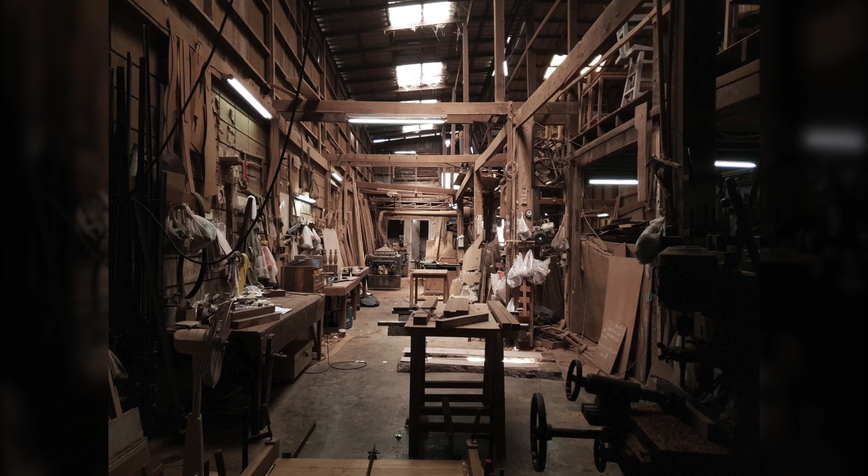Here we start to isolate these illegal additions and draw them up. This is the next one, called the Bangkok Shop House. In the front, it looks like a regular shop house, but once you go inside, it's pretty amazing. It is a wood extension that extends the space by 600%, turning a regular shop house into a wood shop for furniture.

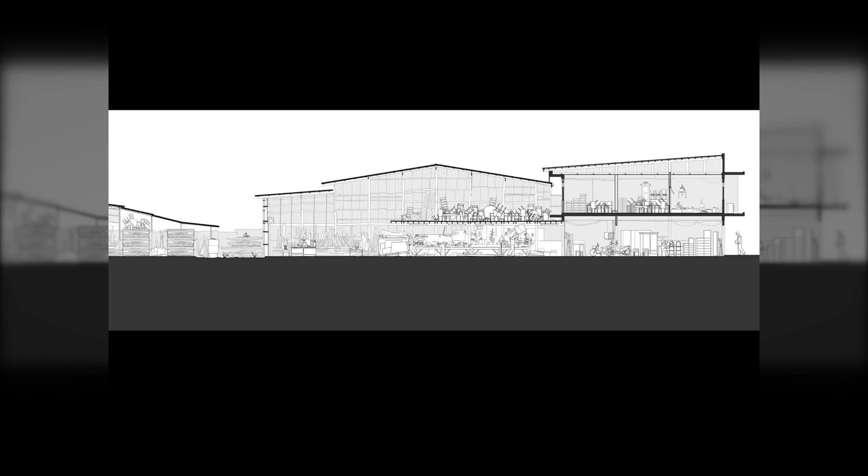And we drew this. Look at this one. This is the original shop house, and this is the new extension. There are all these new inventions that the locals are creating, and we draw it all. We don't draw just to have detail, we draw to learn.

So these are the Bangkok bastards, and what I want to tell you is that everywhere I go throughout the world, I use one morning of sketching to look. This is in Bangalore, with these beautiful container street vendor boxes that you string the canopy with and work with the trees to create space. I just do these little drawings.

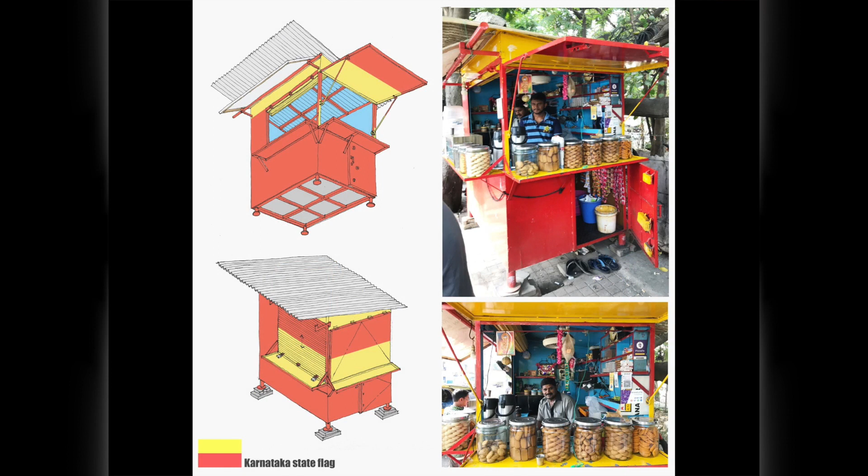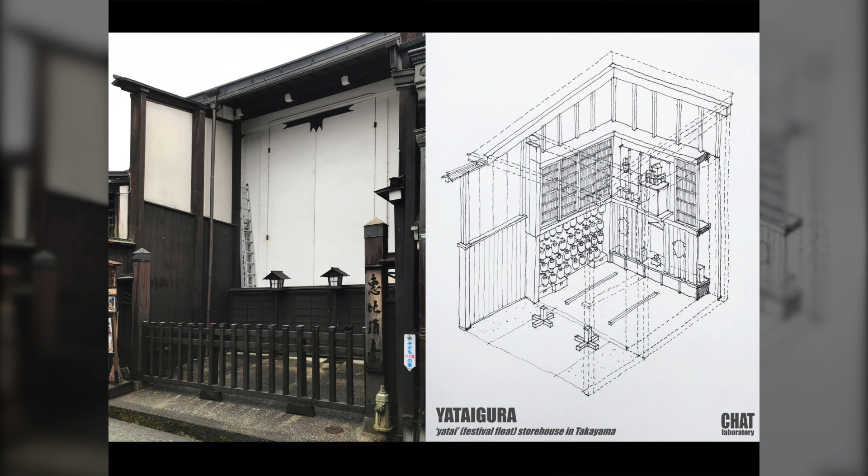To study these local inventions. This is in Bangalore. This is in Takayama. This is a float house—they have these traditional floats, and this is a garage that's distorted. Really beautiful architecture in Japan. So we surveyed all these and drew them, and we learned more about architecture.

So my homework to you, and I would love to work with you—next year I want 3 people to do this. That's it. It's really important.

I have one question left. First one, my name is Saikti. I'm from Surabaya.

After you introduced me to Bangkok bastards, I think they are not bastards anymore. You know, when you told me bastard means having no parents or unknown parents—they were born for a reason, of course, or after some cases, effort again and again, getting better by time. So as modern architecture was born after World War, maybe, or bastard architecture, of course has parents too. If these bastards' parents came from different species, can we call it half-blood maybe? Yes, half-blood, hybrid. Half-blood. Yes.

Okay, what I'm gonna ask you is about law—your own perception, law versus architecture. Both are made by humans. Which one should be more organic in your perception, more flexible, for Bangkok half-blood? Especially for vernacular architecture, which has no architects—in slums or shanties, when their only options left were to break the law or die. Thank you.